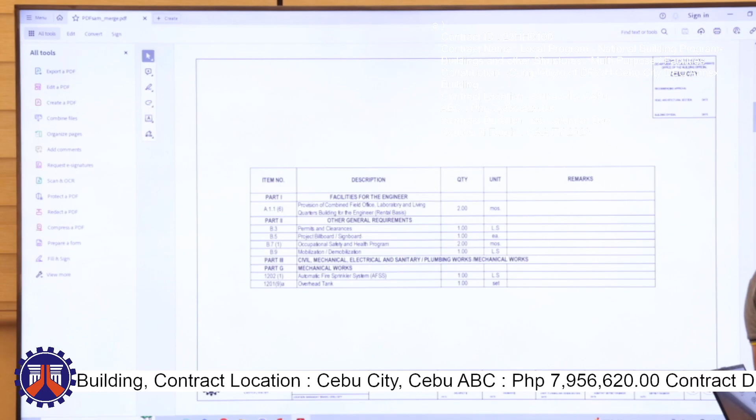Since our allocation is only 7 million, this contract ID's scope of works focuses on mechanical works, particularly our fire sprinkler system. This includes the provision of combined field office, general requirements for permits, project billboard, safety and health, and mobilization or demobilization. That's the full content of this contract for this 7.9 million project.

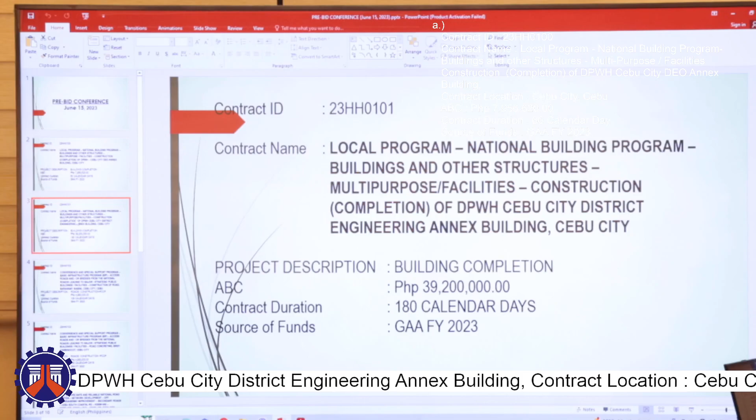To proceed: 23HH0101, Local Program, Building, National Building Program, Buildings and Other Structures, Multipurpose/Facilities, Construction, Completion of DPWH Cebu City District Engineering Annex Building, Cebu City. With an ABC of 39,200,000 and 180 calendar days for its duration.

Same as our first contract earlier, contract 100 - same project, located beside that building. So this is still the completion of the DPWH building.

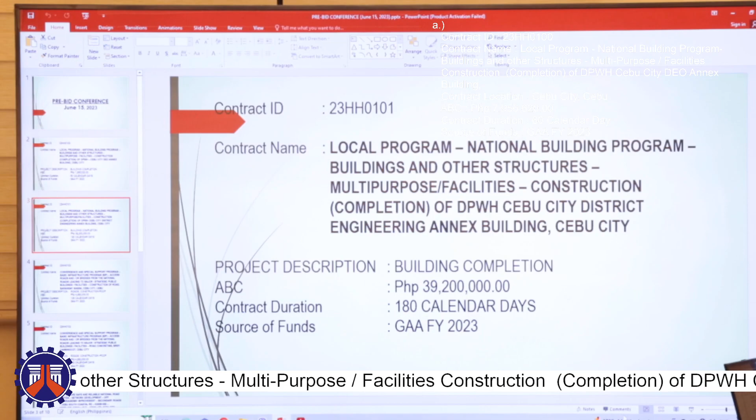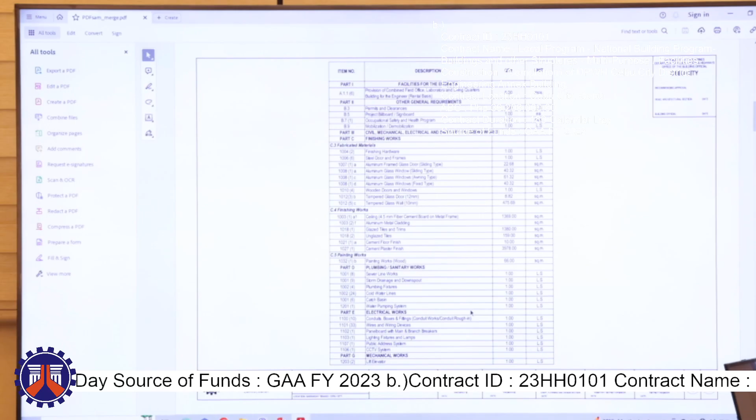For this one, the scope focuses on finishing works, since we expect the current contract's scope to be structural - up to roofing. This 39 million project covers the finishes: partitioning using glass walls, doors and windows, ceiling works, glazed tiles, painting works, plumbing works, and electrical works.

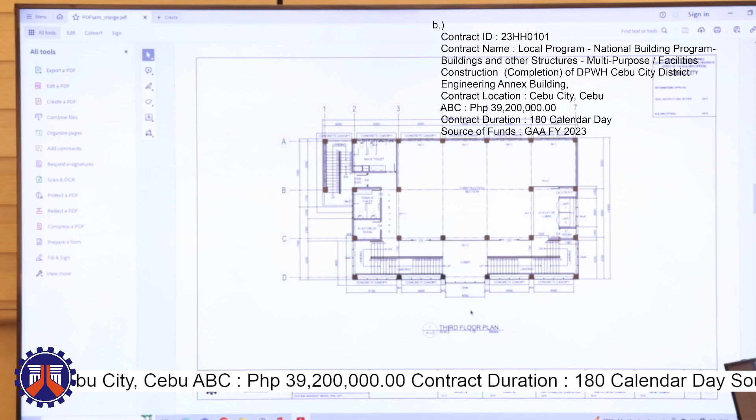For the third contract ID to be presented by Engineer Felicis. Let's leave the road projects for now and proceed to the FCD projects, to be presented by Engineer Salera.

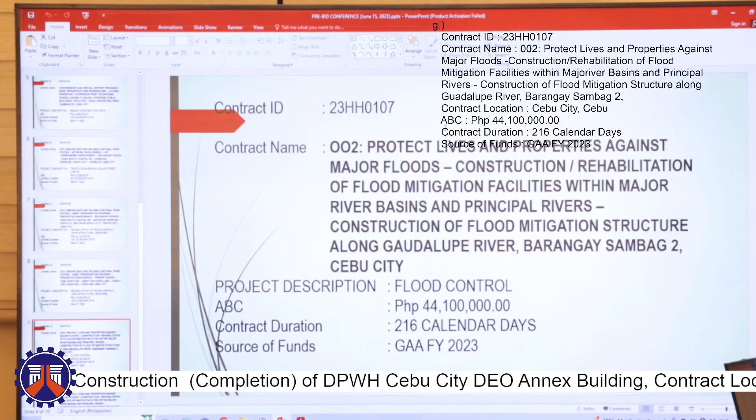For the DED plans, the project has 3 sections along the river, with a total length of 460 meters.

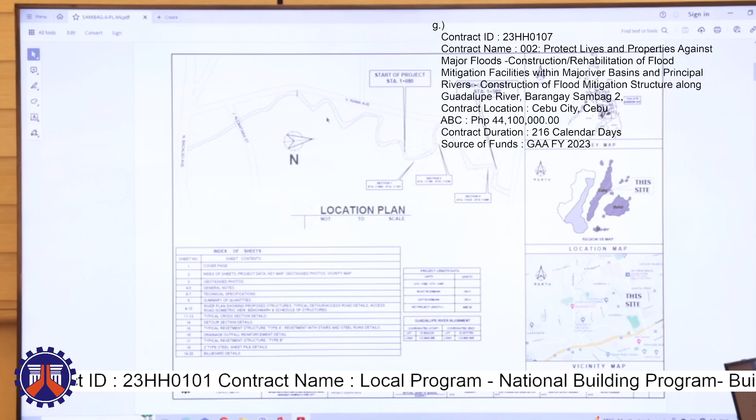Regarding the Guadalupe River, the main landmark there is the B. Rodriguez bridge, along the road leading to Fuente. That bridge traverses the Guadalupe River at Barangay Sambag 2, on the north portion of the river. So three sites were considered on the left and right riverbank.

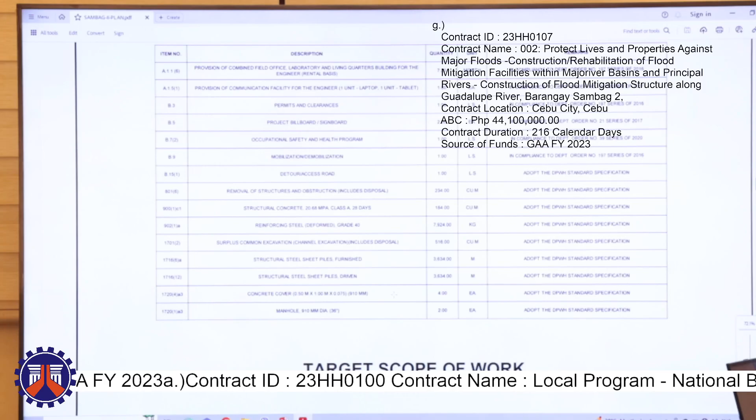For the summary of quantities: first, A.1.1(8), provision of combined field office - equivalent to however many months is our contract duration. Then for communication facility, we need to provide 1 unit laptop and 1 unit tablet. We also need permits and clearances, project billboard/signboard, safety and health program, mobilization, and demobilization.

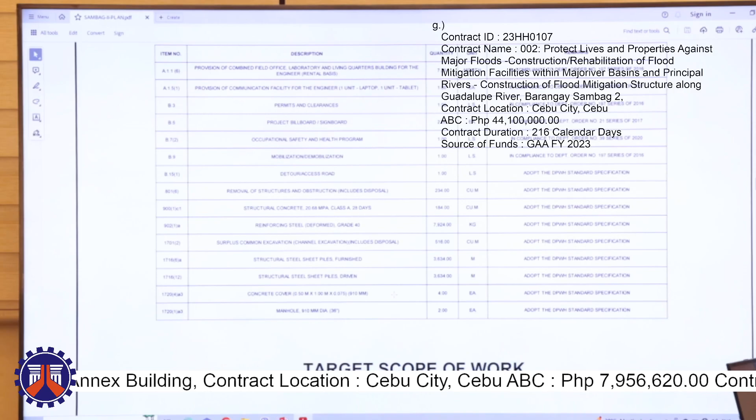Next, we have an access road included in our contract, in our summary of quantities, to address the pathway or access for our heavy equipment going to the river. Then we have removal of structures and obstruction, structural concrete and reinforcing steel which compose our pile cap, surplus common excavation, and we separated the furnished or driven sheet pile which is the main item of the project, then the concrete cover and manhole.

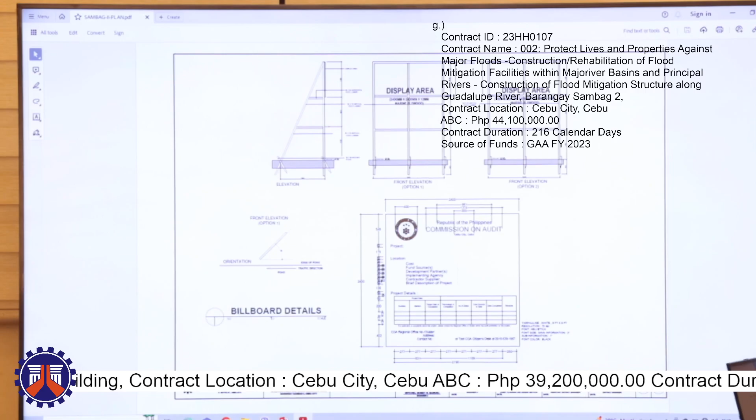Then the next one is same category, construction of flood mitigation structure along Lahug River. The ABC is 44.1 million.

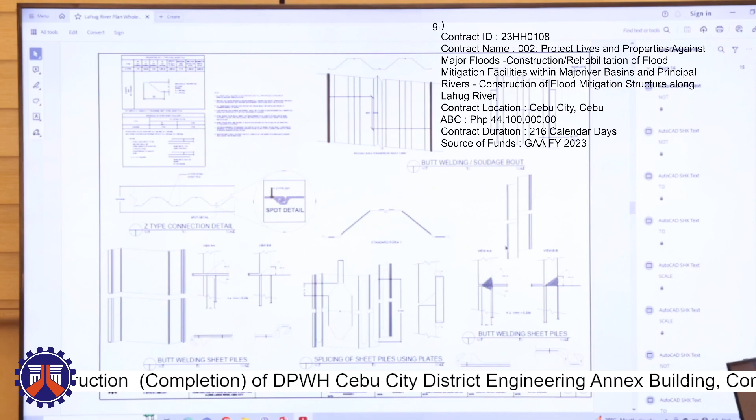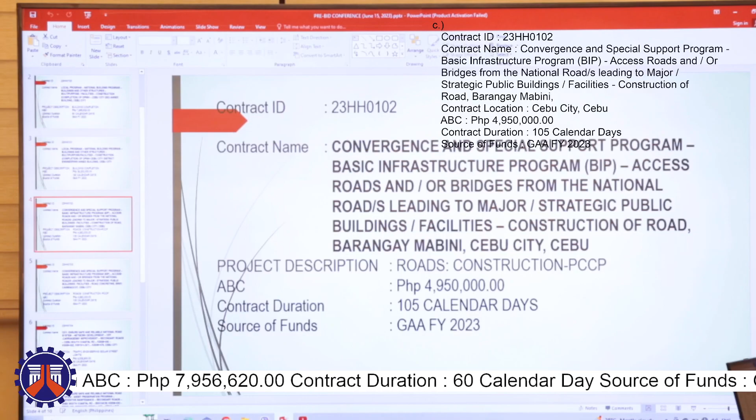For its project description, it is a road construction with a Portland cement concrete pavement as its wearing course.

And then the approved budget for the contract is 4,950,000 pesos and to be completed in 105 calendar days.

So I'll be showing the detailed engineering design plan. This is the cover page for the road concreting at Mabini.

So its station limits, starting from kilometer 21 plus 400 to kilometer 21 plus 640. So the net length for this project alone is 240 meters.

So to discuss in detail, I shall now proceed to the next slide.

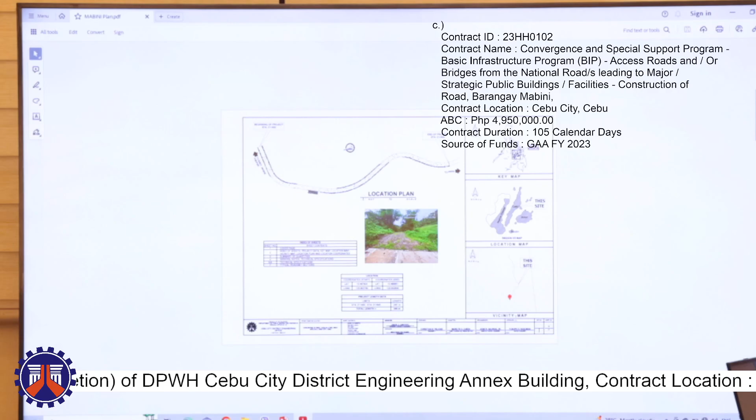So this is the proposed alignment. This is the starting point up to here, and the end point of 240 meters. And then this is the actual photograph taken on site during the site inspection and validation.

As you would notice, it ends here, a previous road concreting project also. This was implemented last 2022. So for 2023, this contract, we are to continue, we just connect this for this particular allocation.

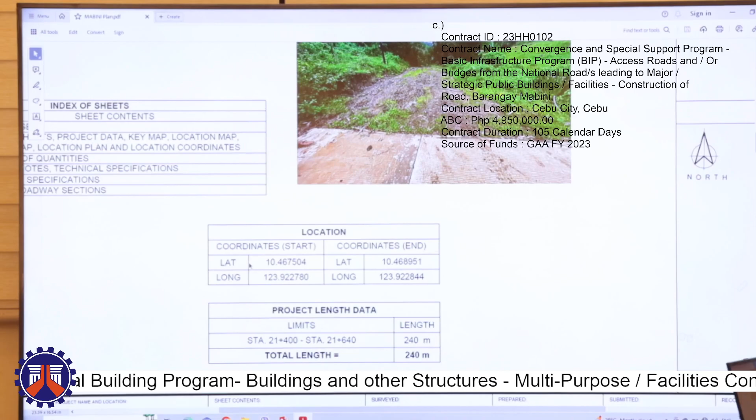So there's not much landmarks here that can be easily distinguished, but we have the coordinates here. So if you could input this on your smartphones, you could still locate the exact limits for the start and end, with latitude and longitude provided.

So here on the right side, this is the alignment specified on this map. There are no structures yet reflected on this map that was captured.

On the next page, this is the summary of quantities, basically the same as previously procured. The general requirements include provision of the combined field office, permits and clearances, billboards, both DPWH and COA billboards, safety and health program for PPEs, signages to be used on site, and traffic management.

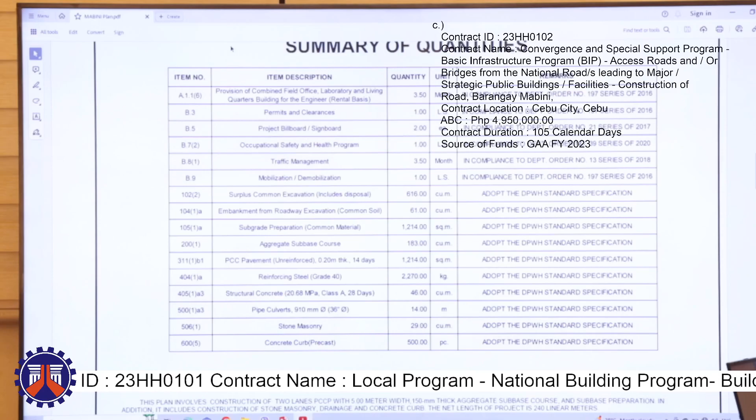Then mobilization, demobilization. Coming into the civil works item, we have excavation, item 102(2), embankment item 104, subgrade preparation prior to placement of the aggregate subbase course, item 200. And then our main scope of work, item 311, Portland Cement Concrete Pavement, 200 millimeters in thickness, having a quantity of 1,214 square meters, our largest allocation for this contract.

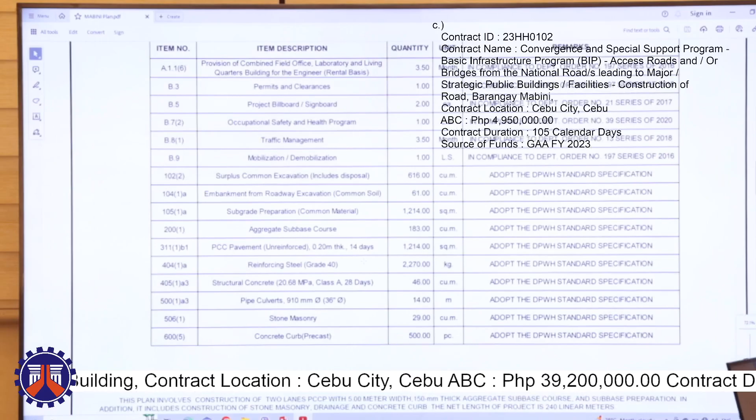Other items include reinforcing steel, structural concrete for construction of the line canal, open line canal, and a cross drainage pipe culvert, 36 inches in diameter. Then minor slope protection in the form of stone masonry consisting of 29 cubic meters. And for protection against vehicles from going into our open canal, we introduce this item, the concrete curb, precast, 500 pieces all in all.

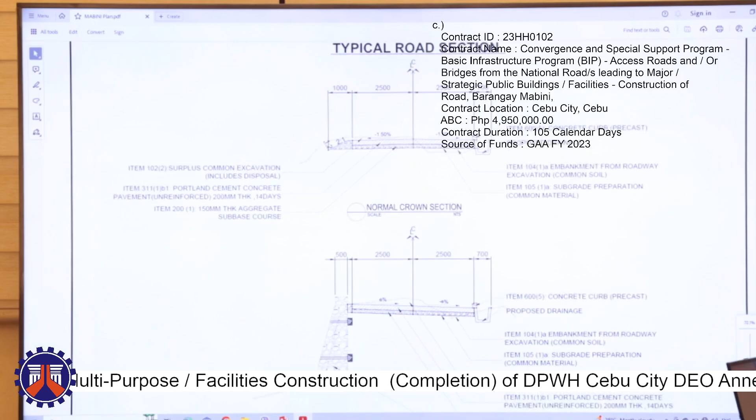Now the technical specs and general notes. This is the typical road section for our project. As you can see, our width, the clear carriageway width, is 5 meters. Then we have the shoulder and the ditch canal, and on the right side this structure, the concrete open canal.

And this one is the concrete curb, for protection against vehicles going to the side. And then this other typical section depicts a slope protection structure on the left side, using stone masonry.

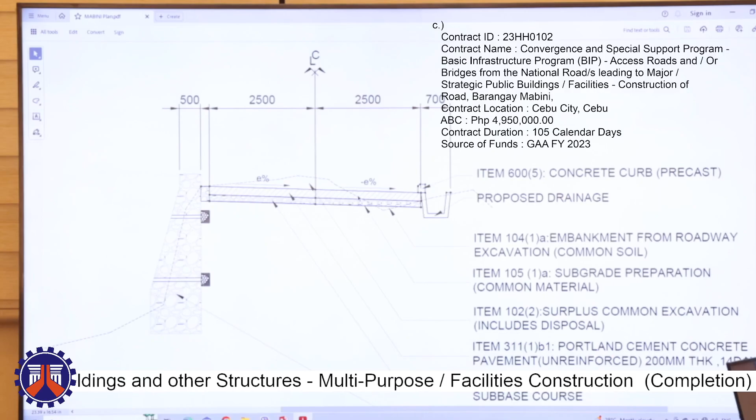Here also, on the topmost part is the Portland cement concrete pavement, and below it our sub-base course of item 200, but the thickness is 150 millimeters. This goes below, prior to placement of item 311, we do the base, sub-base.

Okay, that's it for the Mabini Road Concreting Project. So to proceed, we have contract ID 23HH0103, also a road concreting project, but located in Barangay Cambinocot, part of the 1st Legislative District, Cebu City North District. Its ABC is the same, 4,950,000 pesos, to be completed in 105 calendar days.

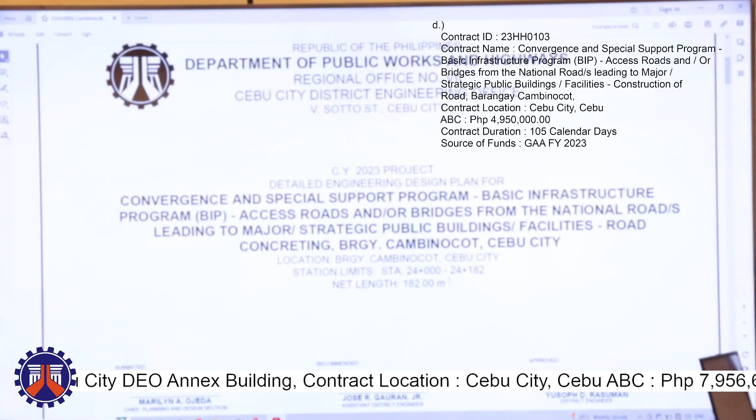So let's open the design plan for Cambinocot. This is the cover page. Its station limits are station 24 plus 00 to 24 plus 182, and the net length is 182 meters. Much shorter since other items were introduced needed for this road concreting project.

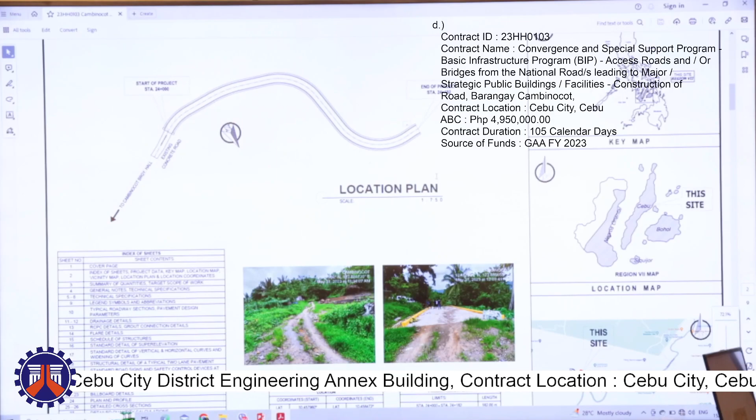From kilometer 24 up to 24 plus 182, so 182 meters is to be worked on for this particular allocation. The situation here is this is already an open road, needing only alignment and grade correction. It's somewhat steep, and we're also to provide sub-base correction and placement.

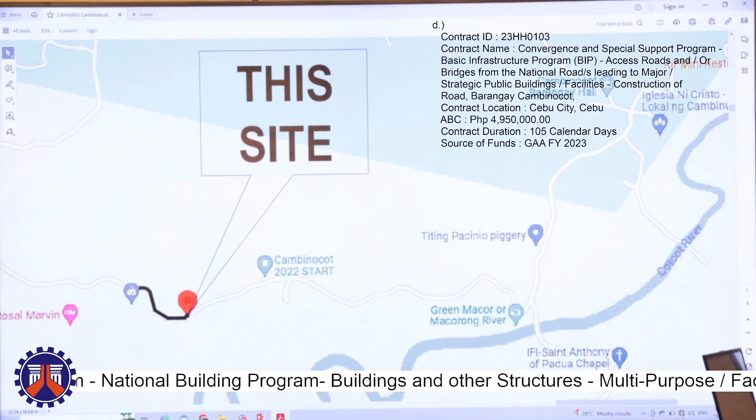Shown here on the map, this is reflected on our Google Map. If you would notice, this road alignment is already registered in the application. If you would also use these coordinates, it can be easily located and followed. So that's the location for the Cambinocot Road Concreting Project.

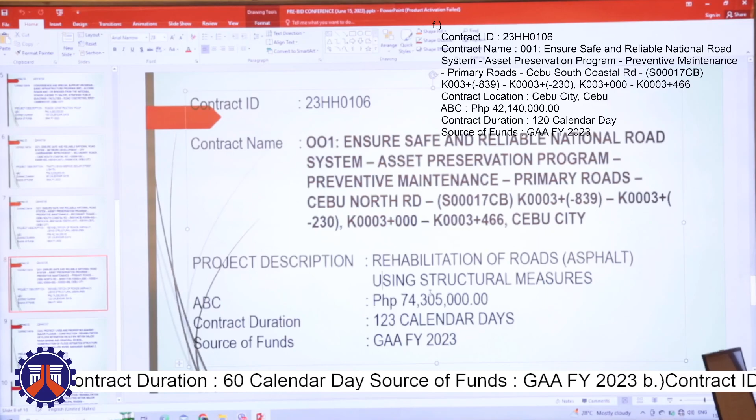For this project, asphalt overlay is the main scope of work. The approved budget for the contract is 74,305,000 pesos to be completed in 123 calendar days. So let's open the file.

For this project there are two sections. The net length for both areas totals 1,068 meters of work. This is the alignment.

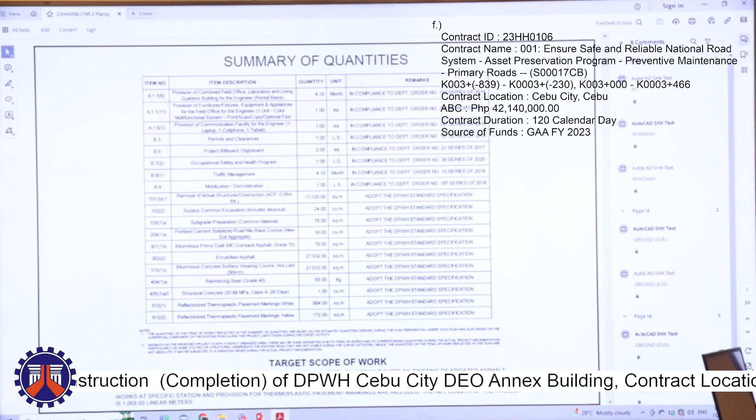For the civil works item, we have introduced item 101-3C1, which is the removal of the existing dilapidated asphalt - removing the old asphalt so that the elevation on that particular roadway won't rise.

We also have item 1022, surplus common excavation. This is used for raising up the manholes, or for correcting our base.

And then item 105, subgrade preparation prior to placement of the CTB. This is small, just base correction on selected areas - only 16 cubic meters for item 204.

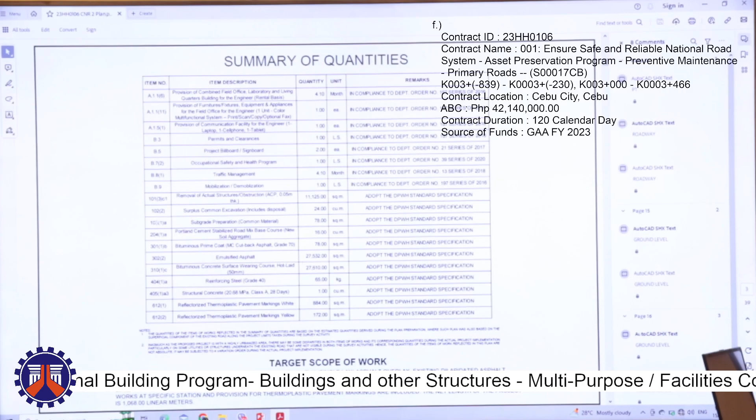Since we have item 204, before we place the hot mix asphalt, we should have item 301, the prime coat. If you notice, it's 78 square meters, so only a small area of base to correct.

And for item 3022, the SS1 or the emulsified asphalt, it comes to 27,532.00 square meters to be applied.

And the major scope of work, major item 310, is the hot mix asphalt with a total area of 27,610 square meters - it's double laid, applied twice.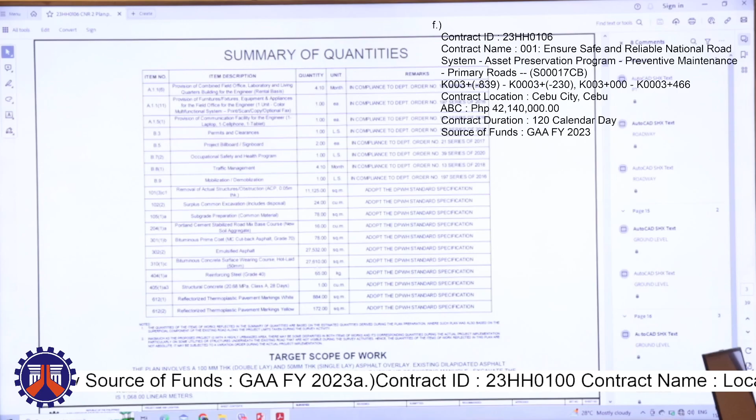Other items include reinforcing steel and structural concrete, used for raising up our manholes so they level with the finished grade of the pavement.

And other items - we have the thermoplastic pavement markings, two colors, white and yellow, since we already have an existing yellow center line. So that's the bill of quantities.

So, these are the technical specifications, the items we will discuss.

Okay, so this is a typical section, right? Just a double overlay, same design. So basically it's easy to work on. And then here, somewhere in this sectioning, we need to correct it based on that.

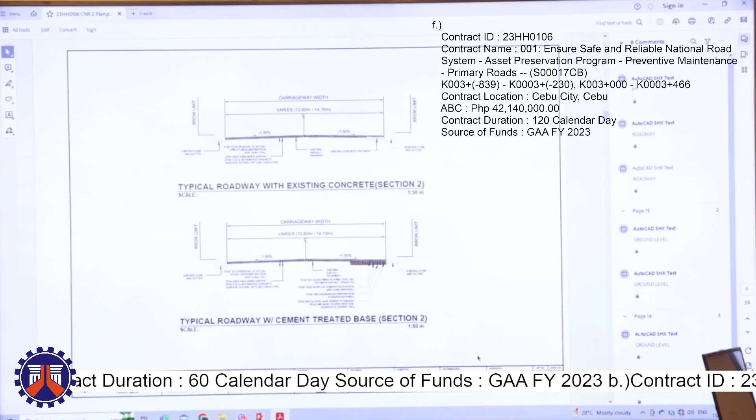To prevent further deterioration of this area, we can fix the problematic area here at Cebu North Road.

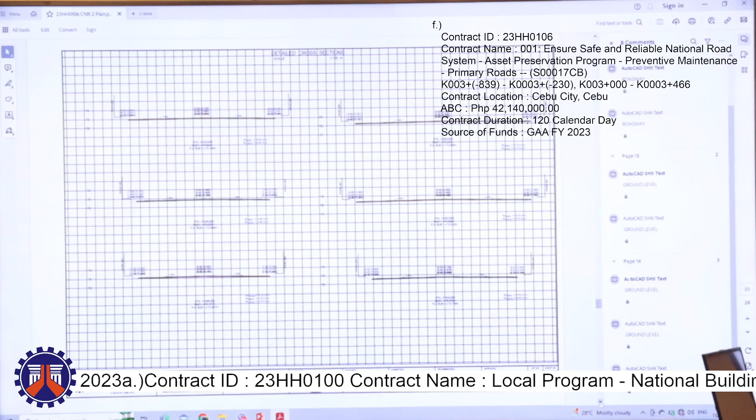Okay, nothing else loaded. So the last part of our plans are the detailed cross-sections, showing the quantities or widths.

Okay, so I hope everything was discussed properly. If you have any questions, please feel free to raise them now while we are here in the discussion. Okay, thank you, Ma'am. Thank you to our respective engineers.

So any questions from our prospective bidders, any clarifications? None? Okay, so before we end, let's go over additional reminders.